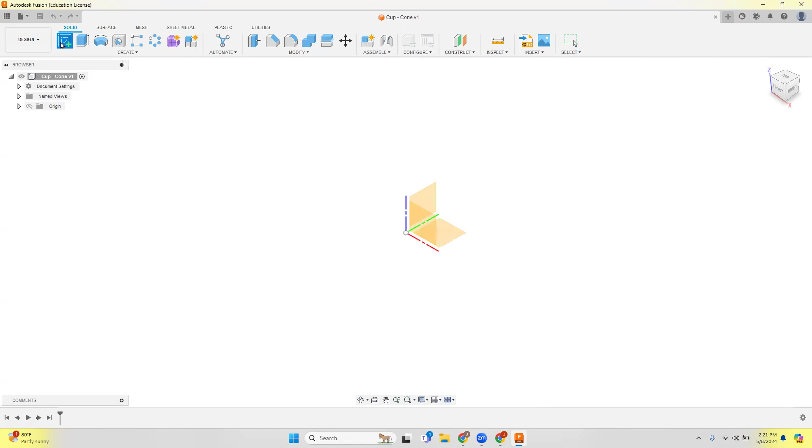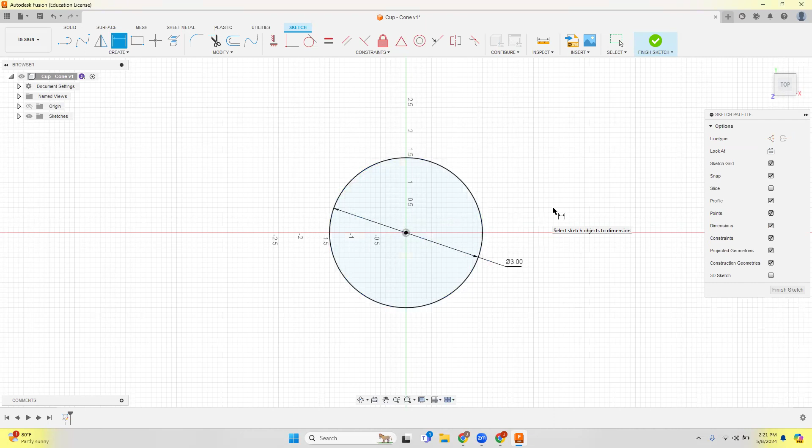So the first thing we're going to do is we're going to create a sketch, and we're going to create a sketch on this bottom work surface here. And I'm going to use the hotkey C to create a circle at the origin here. And D is my hotkey to left click, move, left click, and then I'm going to make a 3-inch diameter circle. Once I'm done with that, I'm going to finish the sketch up here at the top, the green check mark. And I'm going to use an extrude this time.

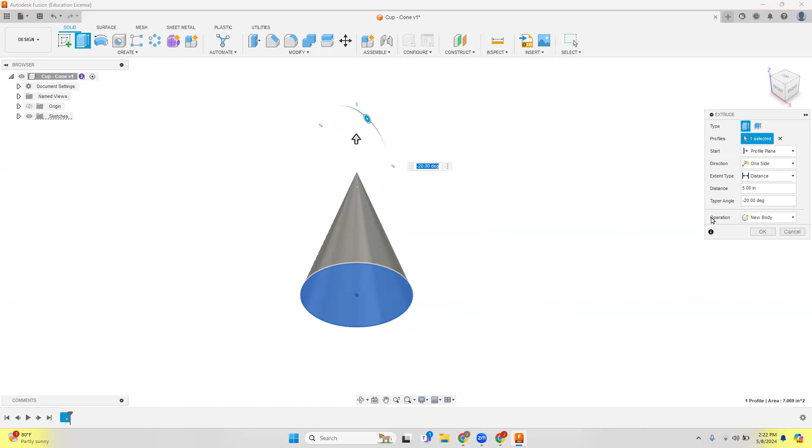As I extrude this upward, you can just kind of click and drag. And then I'm going to use this tool right here so that I can taper it to a 20-degree taper, just like that. Say, okay. It's actually a negative 20-degree taper as it makes this cone. Now, there's a lot of ways to make a cone. You can make a triangle, and then you can revolve that triangle. But I like the taper method for this. Gets the job done pretty easily.

Now, it creates this body over here on the side that I can right-click, and I can hit properties. And the great thing about this is it actually tells me some things about this particular item. It has a generic material to start with, but it tells me the volume of that particular cone. Now, we know that a cup is 14.44 inches cubed based on our previous video on Onshape. So I just did a quick Google search, what are the dimensions of a cup in cubic inches, and it's 14.44 cubic inches. Now, I could go through and say, here's the radius of my cone, what does the height of the cone need to be in order to get this particular volume?

But again, I might not have students that are able to do that calculation. I might be dealing with middle school students that, we're just looking at cones in general and looking at their shapes. And we might just talk about scaling and scale factors in this. I'm going to use a scale factor to convert this volume to a bigger volume. So I'm going to need to multiply by 1 point something so that I scale this up. It's got to be bigger than 1 because this volume is too small. It needs to be 14.44, and this one's only 9.71. So how do I do that? How do I make this volume bigger?

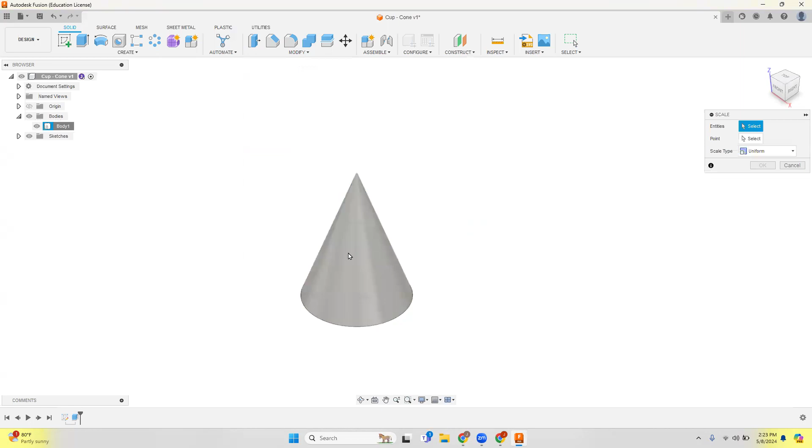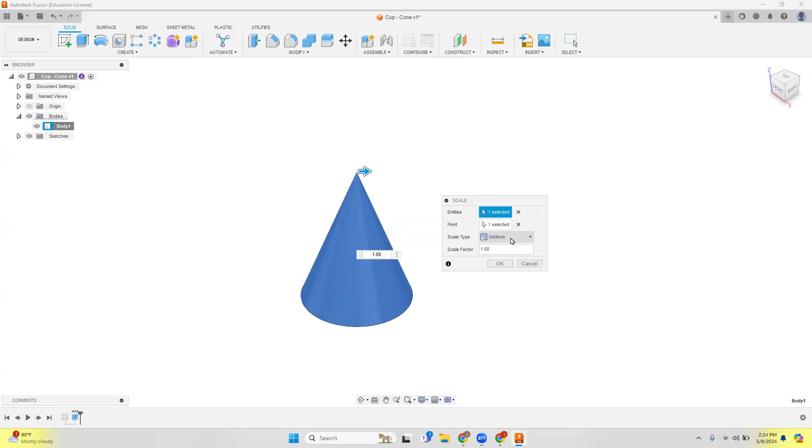Well, I'm going to use the modify tool, hit scale, and I'm going to scale this by a certain factor. Now, because I'm using a cubed unit, I can't just scale it one way or another if I want it to be consistent. Now, the nice thing is I don't have to have this consistent. There's nothing in what I'm making that says that it has to be this exact same size or retain this same scale ratio. So if you're dealing with lower age students, like middle school students or upper elementary, I would turn this off and do a non-uniform scale and just either make it fatter one way or the other, or make it taller.

Now, for me, I would probably make it taller because if you change the Y scale, it's going to look oblong. So it's not going to look right. So I would do a non-uniform scale of this, and then I would just stretch the Z to be taller. So that's where we're going to start. We're going to start with that one first. That's not what I want. I want this right here where I'm going to go to calculator, and I have 9.71, and I'm going to divide that by 14.444. And so this is 67% of what I need it to be.

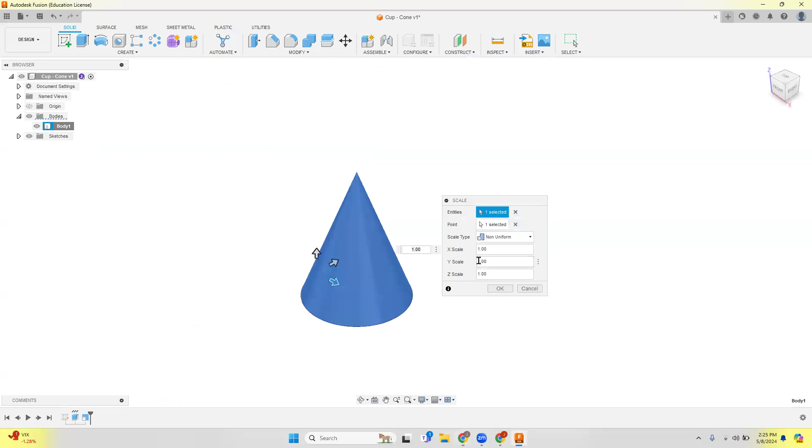So if I inverse this, it's not really a thing on the calculator. So I'm just going to do 1 divided by that answer. And that's going to tell me that's 1.487 times too small. I'm going to go back into Fusion. In my z-scale, I'm going to put in 1.4827. Is that the number?

Just 87. If I hit OK, again, it stretches it that way. And if I right-click now and go back to Properties, look at there. My volume is now what I want. So there we have our volume.

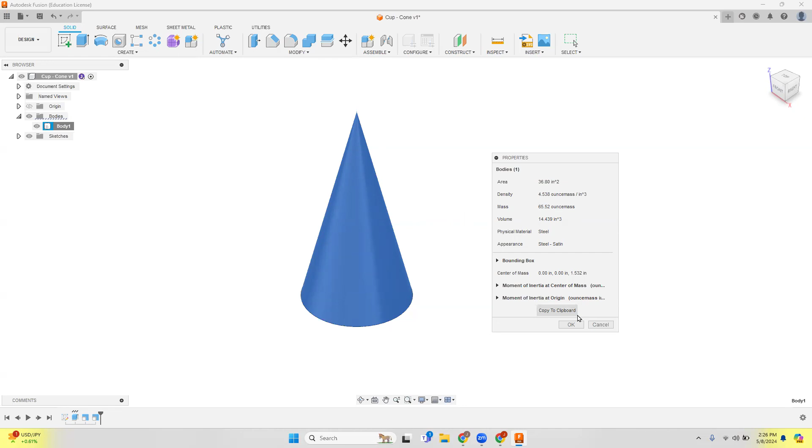We've got 14.44 essentially. And now we can do the shell feature so that we can hollow this out, but we want the shell to be to the outside because this is going to be my container. So I'd go into Modify, do the shell. I want to remove this face, and I want the shell to be to the outside of the body.

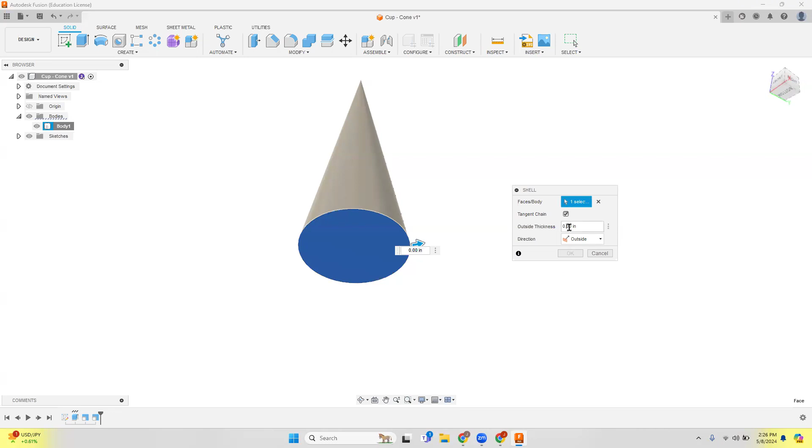So the direction is going to be outside, and I'm going to make it 0.1 to the outside of that, and I'm going to say OK. And now I know that my container, the inside of that is going to hold 1 cup of material.

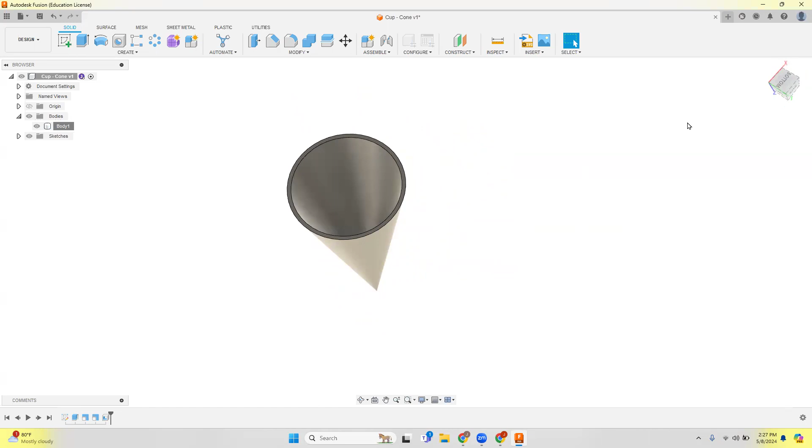Now, what if you don't want it to be stretched long like that, and I want it to be a similar shape as my original? So that's what I'm going to work on now, is how do I make that? Okay, so to do that, I'm going to go back into my scaling. I'm going to delete those things I just did. So I'm going to get rid of these scale factors. Go back into what my original cone looked like. So I want it to be kind of short and stubby like this.

So in that case, the math is a little different. So instead of doing this, I need to do the cube root of this. And the reason why I have to do the cube root of it is because I've got a volume. So it's a length, width, and height so that the total scale goes up by this number. So I can take that number and put it to the exponent of 1/3 or 0.333 repeating. And now it will tell me here's what my scale factor needs to be. 1.1414 for each side of my 3 sides.

So I'm going to go back into Fusion, go back into Scale, and this time I'm going to do a uniform scale, and this is going to be 1.14143. If I hit OK, and I right-click on Properties, you'll see that I get that volume now of 14.44, but it's a completely different shape than the last one. I didn't stretch the z-axis. I increased all of them by 14%.

So if I make it 14%, 14%, 14%, then all of a sudden my total dimensions went up by 48%, whatever the number was that we needed to be bigger. I hope that makes sense. Again, when you're doing square units, you take the square root instead to find the scale factor. So if you want something to be twice as big an area, you don't double the length and double the height.

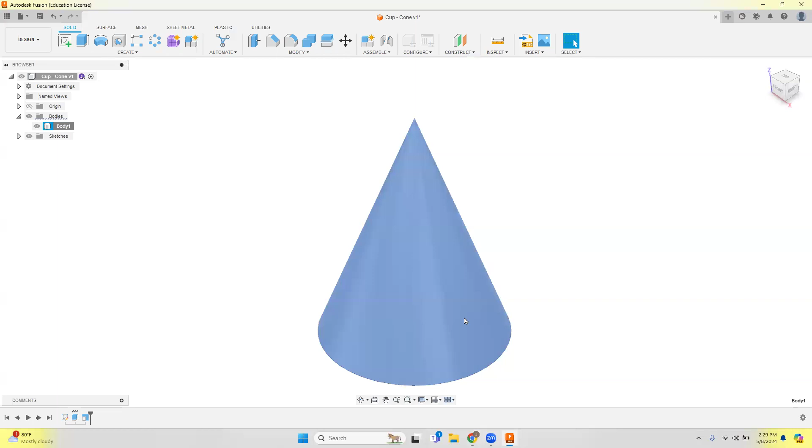So again, I'm not really sure where that's taught content-wise in math, where you're doing scale factors and looking at areas, and if you double the length, what's it do to the area? If you double the length and the width, what does it do to the area? But again, I think those are concepts you can bring in to the problem-solving process of something like this. So I hope that makes sense.

The last thing we're going to do is we're going to then export this to 3D print. So really simple in Fusion, first I'm going to save it, and then I'm going to go into Utilities, and there's a Make button. And I always uncheck the Send to 3D Print utility. I don't want to send it there. I just want to save the file.

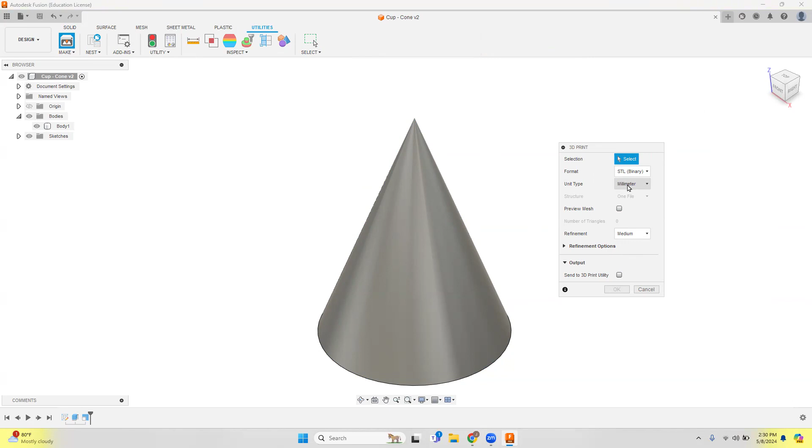Again, make sure your unit type is at millimeters. That is for the slicer software. Most slicers want the object that you're importing in millimeters. That's usually their default. So that's what we're going to do. We're going to select this item, and then we're going to say OK.

Then we're going to name it, cup cone. And it's going to be saved to my downloads folder. I'm going to hit save. And now that's going to be ready for my slicer. I'll have another video on how to import all these into a slicer. We're going to 3D print them, and then we'll be ready to go for some testing. So hopefully that made sense.